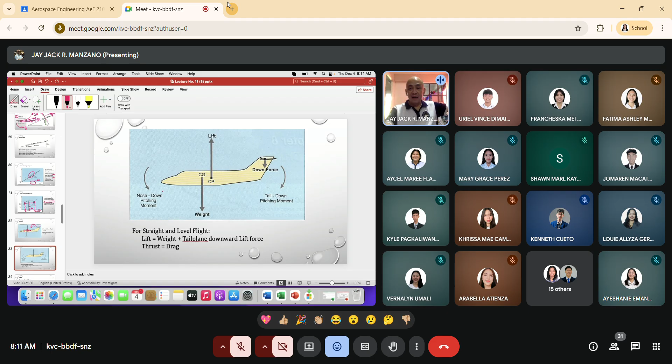So, two types of specific range. So, we have specific air range, no? And we have also a specific ground range, no? SGR. The difference is due to wind strength and direction. If wind is to be considered, no, specific range is SGR. Now, take note, yung aircraft selection ngayon is also considered yung range.

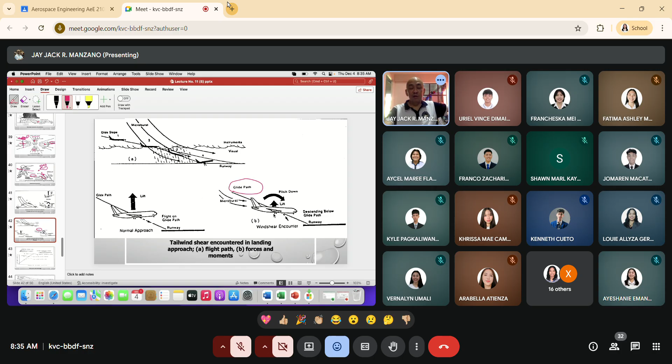So, laking bagay, di ba? Sa rocket, ganun rin. Siyempre, but I'm familiar with the rocket. But of course, it also applies, no? This controllability and maneuverability for the vehicle. Okay? So, we have, if there is ice formation, no?

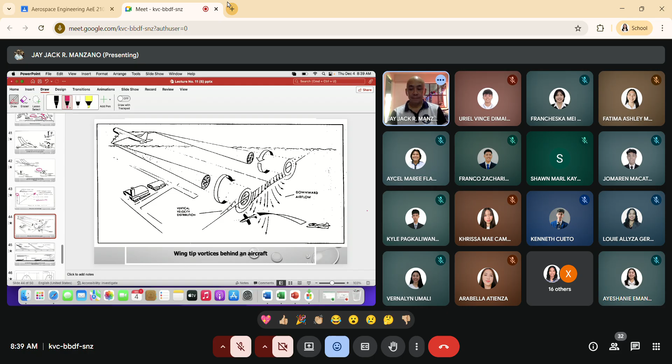Then, of course, this is turbulence. Okay? Vortex. So, this is just an addition. The bigger the airplane, the bigger the vortex. Or this is vortices. So, I think this is discussed already. So, this is heavy transport. Okay? So, this is landing. Yung B natin is landing clearance to avoid wake turbulence. The other one is take off.

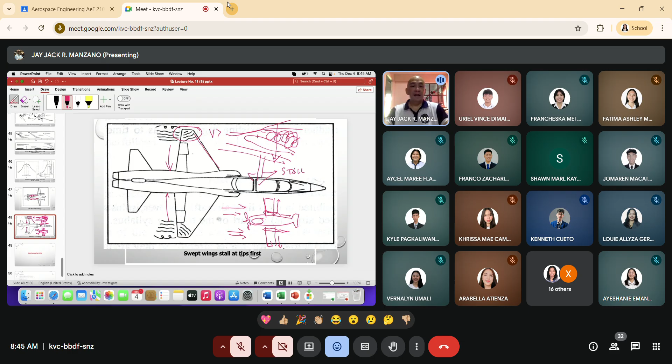Okay, then afterwards, we will have this. Okay, but first, siyempre, we have to take a break. Take a break muna tayo. So, 2 minutes. Ano na eh, Christmas break na eh, no? Kayo, next week pa.

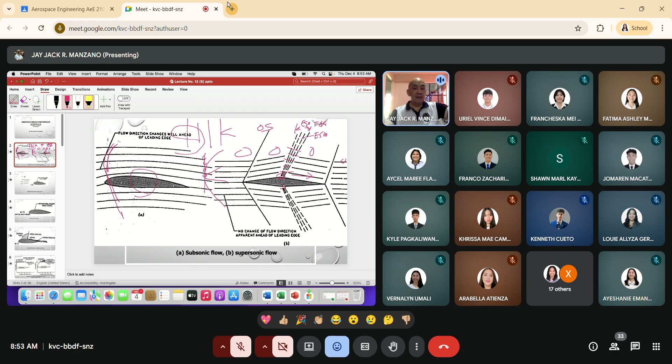So I think you will have a supersonic aerodynamics, no? So i-discussin nyo to, everything, magmula rito, magmula riyan, hanggang dyan. Tapos kukunin nyo yung lift nito. Buong okay lang sana kung ako magturo, alam ko na yung continuation yan.

Okay, so yan. Then let's go back now with subsonic wing. Subsonic, so Mach is equivalent to velocity over speed of sound. So alam niya na yung speed of sound sa velocity. And yung Mach number, wala siyang units.

Then for Mach 0.72, that is critical Mach. So we will have now the maximum local velocity equals to sonic. Ibig sabihin sa Mach 0.72 ng aircraft, sa pakpak umaabot na siya sa sonic speed, kasi mas mabilis yung flow sa wing kaysa movement, lipad ng eroplano. So ibig sabihin, kung critical Mach number mo, ito yung binibigay ng eroplano, ito siya, yung movement ng air dito, mas mabilis. So that is approaching sonic.

Now, for a bigger airplane, commercial airplane, maximum speed niya is 0.85. Ang bilis, di ba? Konti na lang, 0.15 na lang, critical Mach number na siya. Yung critical Mach number kasi, MCRIT, kahit saan ka pumunta, ito yung MCRIT. Critical Mach number is equivalent to 1.0.

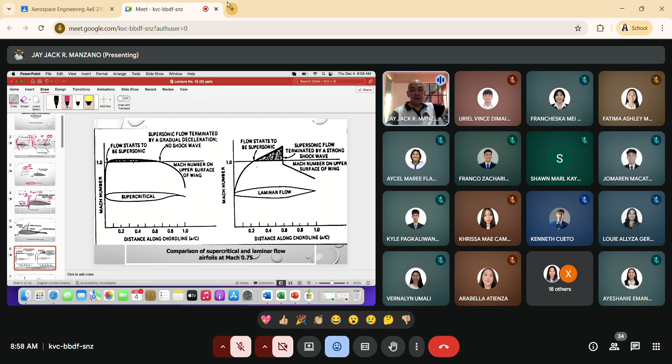Kapag yung aircraft mo ganito, siyempre mababa yung coefficient of lift mo, mababa yung lift mo, di ba? Pero lift is a function of velocity. Lift is a function of velocity. So if you increase the velocity, the lift will increase.

So ito, jet yan, jet. So what happens? Lagyan mo ngayon ng malakas na makina, then it will push the aircraft. So you will have a greater velocity, so you will increase your lift.

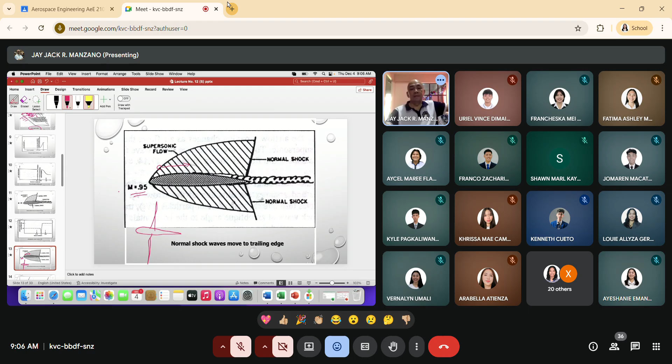Ito na yung shockwave. Okay, nariyan na siya. 0.95 na yan. Konting tulak na lang, tatakbo na yung shockwave niya. Okay, so 1.05, Mach number 1.05. Makikita mo, nagkaroon na siya rito ng shockwave formation. Pumasok na siya rito.

Meron pa rin siya, siyempre, no? Pero tumakbo na siya rito, naging oblique na nga yan, no? So meron na siya rito, tumakbo yan, umandar pa rin, umandar pa roon. Then naging oblique na siya rito sa trailing edge. So yan, ibig sabihin, nag 1.0 siya, sobra na 1.05.

We have bow wave. Diretso pa rin, may bow wave pa rin yan, no? But of course, the inside of the wing, meron na siyang oblique shockwave na yan. Ito, nag-oblique shockwave, mga OSW yan.

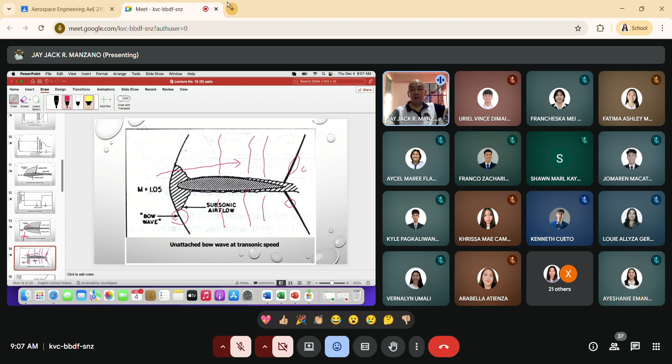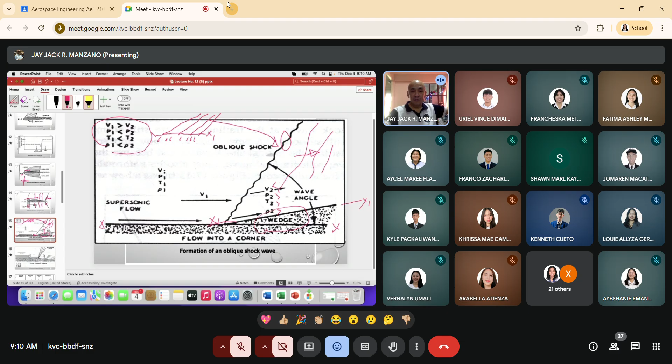Yan, okay, so tapos na tayo rito sa X na to eh. So gumapang na siya dito sa panibago, X1. Gawin natin X1. So dito sa X1, dito na siya gumapang. So if you can visualize, ito na yung X1 natin ngayon. So pinatag natin, kasi alam na natin yung mangyayari rin eh. So X1. Okay, patag na siya. Then ito ngayon yung X1 natin.

Then, of course, we have here, pag ganun, is your X2. So X2 ngayon, kung pinatag mo yan, tapos po ba siya, assuming na ganito yan, isura ng airfoil natin. Diamond shape, ayan, exaggerated na yan. So dito ka dumaan, then dito ka dumaan. So ibig sabihin ito, meron kang expansion, meron ka ritong oblique, meron ka ritong oblique. Okay, so ito na yan.

So magkakaroon ka rito, pag abot rito, e-expand, yung this is expansion wave or what you call expansion fan. So the velocity will become greater. Okay, the pressure will become lesser. Temperature, lesser, and density, lesser. So ang bilis ng velocity. So ibig sabihin, yung downstream mo, pagpasok niya rito, yung velocity mo will be your velocity here, which is less than dito.

Then dito naman, pagkadating niya rito, tatawid siya rito sa expansion, bibilis siya. Okay, bibilis. Then the pressure goes down, the temperature goes down, and the density goes down, until such time na dito siya, until such time na tumama na naman siya rito sa velocity na to. Okay, tatawid siya rin sa oblique. Oblique rin to, oblique shockwave.

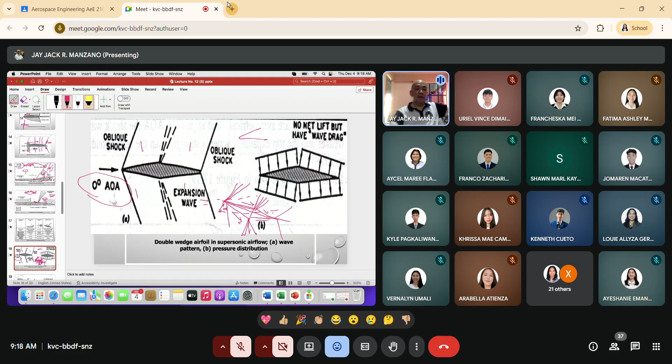So, there are many modifications. So, that is performance. As I've said before, even if it's subsonic, even if it's high speed, there are only two aspects of performance, right? Maneuverability and controllability. That's it. Okay. To assure that there is performance.